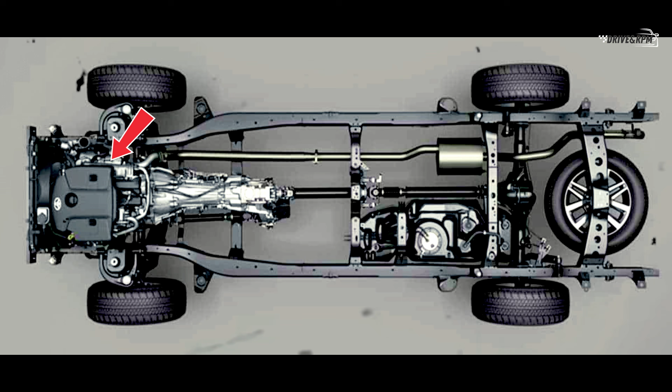For over 70 years, the undisputed golden rule of building an indestructible off-road vehicle was absolute and unyielding. The formula was simple: you take a massive internal combustion engine, bolt it to a heavy, sluggish mechanical gearbox, attach a cast iron transfer case, and run a thick, solid steel drive shaft straight down the longitudinal center of the chassis to physically connect the front and rear axles.

The legacy automakers firmly believed that true durability could only be achieved through heavy, twisting, analog metal. They trusted friction. They trusted physical gears. The 2027 GWM Tank 300 did not just refine this century-old architecture. It put a bullet in it.

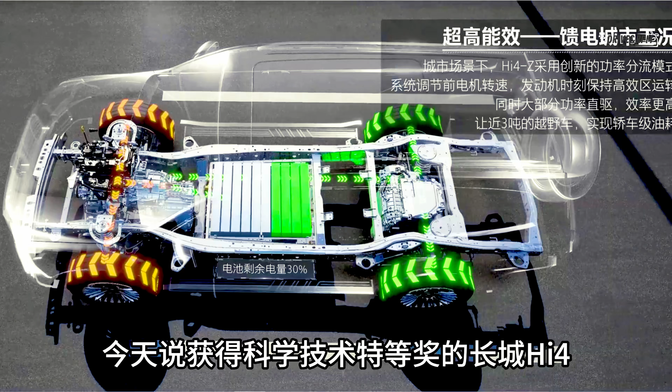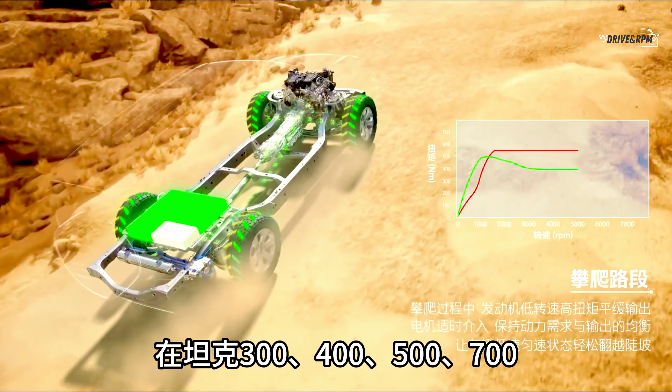GWM engineers have completely severed the physical connection between the front and rear of the vehicle. If you look underneath this new chassis, there is no central prop shaft. The transfer case has been thrown in the bin. The mechanical drive shaft is entirely dead. In this forensic engineering teardown, we are going to expose exactly how Chinese high-voltage architecture just destroyed the traditional 4x4 system, and why the mechanical off-road era has officially come to a violent end.

To truly comprehend the magnitude of this disruption, we must conduct a forensic teardown of the brand new Hi4-Z architecture and compare it to the legacy system still being sold by the Japanese establishment.

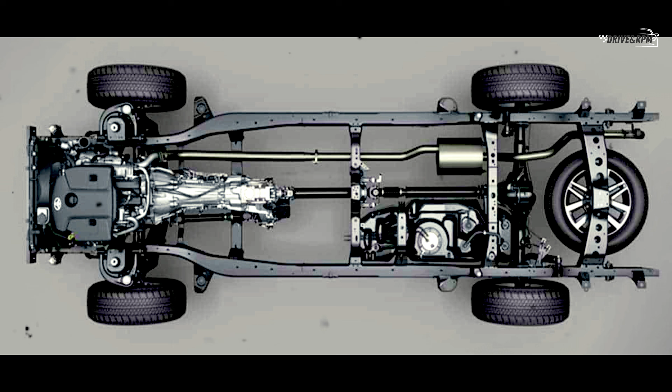In a traditional four-wheel drive vehicle, like a Toyota Land Cruiser or an SW4, your engine's power is forever held hostage by mechanical latency. When you press the accelerator in deep mud, kinetic energy must travel from the crankshaft, through a torque converter, into the transmission, down through the gears of the transfer case, along the heavy steel drive shaft, into the rear differential, and finally out to the wheels. This process suffers from parasitic drivetrain loss. You lose up to 20% of your engine's power simply through the friction of turning all that heavy iron.

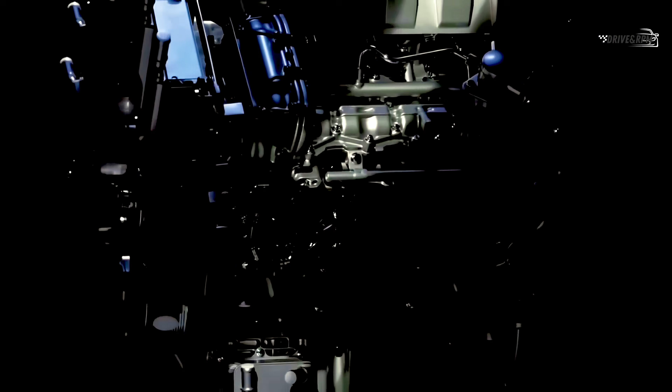The 2027 Tank 300 completely bypasses this analog nightmare. Under the bonnet sits a highly thermally efficient 2.0-liter turbocharged combustion engine. But it is no longer the sole master of the drivetrain. It operates in high-voltage synchronization with two independent ultra-high output electric motors, one on the front axle and a massive unit on the rear.

Because the central drive shaft has been eliminated, these two axles are entirely mechanically independent. They communicate via high-speed, shielded fiber optic data cables rather than a rotating steel tube. This is a 100% electronic by-wire four-wheel drive ecosystem.

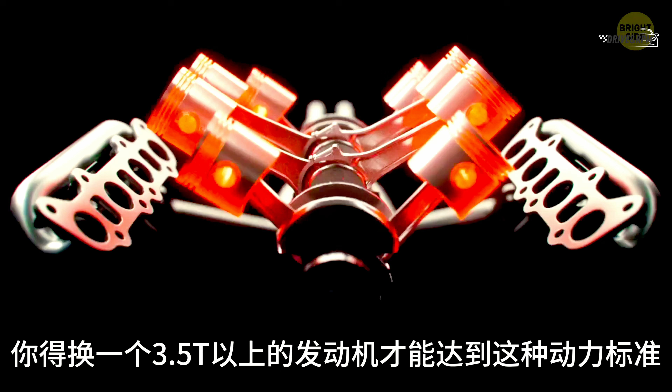The resulting power output is frankly absurd for a mid-size off-roader: a combined 635 kilowatts, roughly 850 horsepower, and over 1,100 Newton meters of instant 0 RPM torque. When an SUV built on a ladder frame can deploy 850 horsepower to individual wheels in fractions of a millisecond without waiting for gears to mesh or shafts to spin up, the fundamental physics of off-road traction are rewritten. The vehicle can push forward with maximum force instantly, making the mechanical delay of traditional locking differentials look entirely prehistoric.

The genius of the Hi4-Z platform is not just what GWM added, but what they ruthlessly removed. When you rip out a massive steel drive shaft, a heavy iron transfer case, the cross members required to hold them, and the central exhaust routing from the belly of a ladder frame vehicle, you are left with an enormous empty structural void underneath the cabin floor pan.

If a legacy automaker like Ford or Land Rover encountered this newfound space, they would likely fill it with heavy structural bracing or simply leave it empty to increase ground clearance. GWM's packaging engineers took a radically different approach. They looked at this massive void and saw the ultimate solution to the greatest problem plaguing the electrification of off-road vehicles: battery capacity and weight distribution.

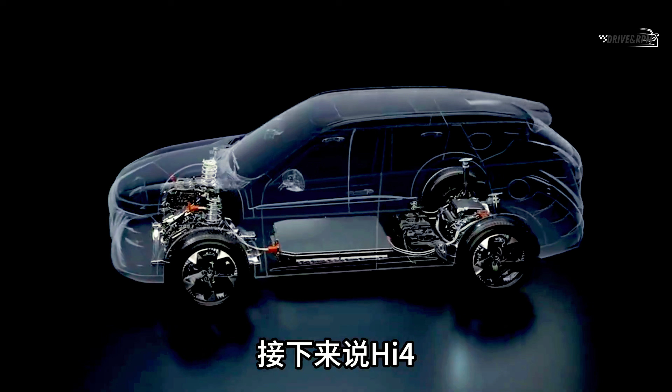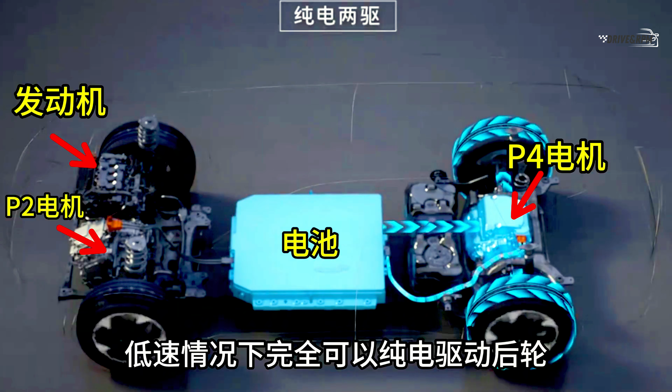Tucked safely, deeply, and securely between the thick, high-strength steel rails of the Tank 300's chassis sits a colossal 59.6 kilowatt-hour battery pack. Let the sheer scale of that sink in. A capacity of nearly 60 kilowatt-hours is substantially larger than the battery packs found in many dedicated, pure electric hatchbacks driving around London or Sydney today.

Yet GWM has packaged it entirely inside the underbelly of a hardcore, mud-plugging, water-wading SUV. This massive energy vault allows the aerodynamically blunt Tank 300 to travel up to 200 kilometers purely on electric power. You can commute through heavy urban traffic all week without the combustion engine ever waking up. But the moment you leave civilization, the turbocharged engine seamlessly transitions into a highly efficient onboard generator, feeding electricity directly to the motors and the battery, delivering infinite range.

This system violently exposes the pathetic 48-volt mild hybrid systems used by Toyota as little more than marketing gimmicks. Furthermore, placing 60 kilowatt-hours of dense lithium-ion cells at the lowest possible point in the chassis drops the center of gravity drastically, pinning the vehicle to the tarmac through high-speed corners and preventing rollovers on extreme off-road cambers.

Now, the automotive purists and traditionalists will immediately raise a valid engineering concern. They will argue that an 850 horsepower electronic drivetrain and a massive underfloor battery pack are completely useless if the skeleton of the vehicle snaps, twists, or fractures when subjected to the violent forces of the wilderness. If a chassis flexes too much under extreme axle articulation, such as climbing a boulder field where diagonal wheels are suspended in the air, the doors will jam, the high-voltage battery casing could rupture, and the vehicle will destroy itself.

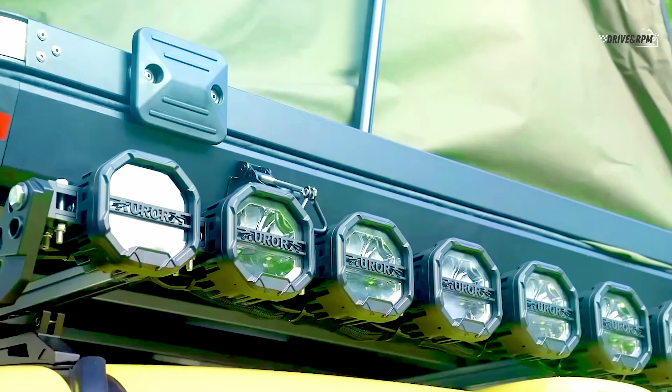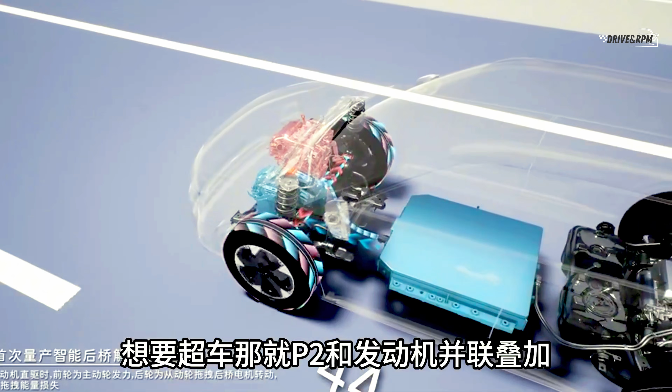GWM stretched the wheelbase by an astonishing 260 millimeters to accommodate the new Hi4-Z architecture, whilst simultaneously pushing the front axle forward to drastically improve the approach angle. Underneath the body panel sits a fully reinforced ladder frame chassis, constructed almost entirely from hot-stamped, ultra-high-strength steel. We are talking about tensile strengths exceeding 1,500 megapascals in critical load-bearing areas, the kind of metallurgy usually reserved for submarine hulls and ballistic armor.

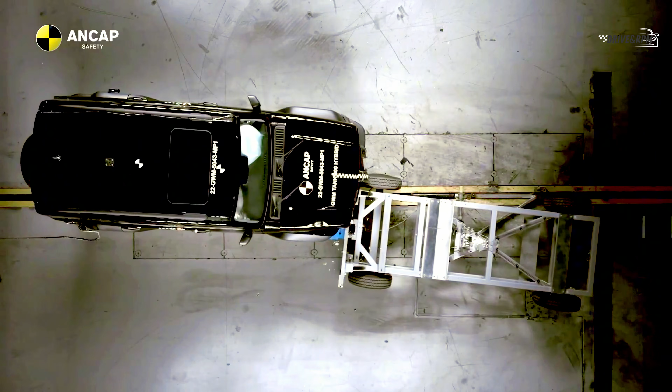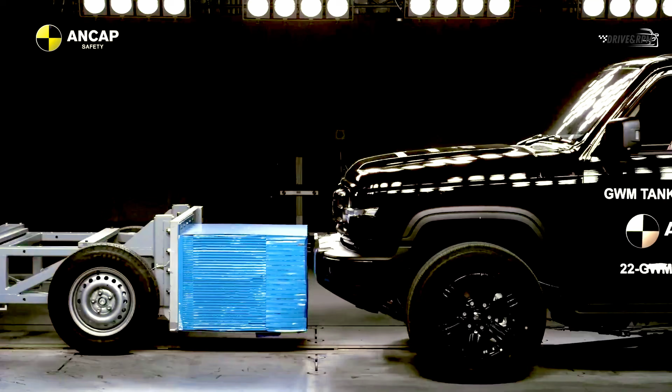This guarantees absolute zero chassis flex, because the frame remains perfectly rigid. The independent double wishbone front suspension and the heavy-duty multi-link rear geometry can stroke through their maximum range of travel without binding. The suspension actually does the work, rather than the chassis twisting to absorb the impact. This proves that you can have the computational power of a supercomputer and the torque of a hypercar, whilst retaining the indestructible, rock-solid baseline of a true wilderness explorer.

The final, devastating nail in the coffin for traditional mechanical four-wheel drive systems is how the 2027 Tank 300 Hi4-Z actually interacts with the topography of the Earth. If you are piloting a standard Toyota Land Cruiser or a Hilux SW4 through a treacherous off-road trail, your survival is dictated entirely by human reaction time and physical mechanical intervention. You must manually assess the mud, stop the vehicle, engage the low-range gearbox, press the buttons to lock your physical differentials, and hope your tires find grip.

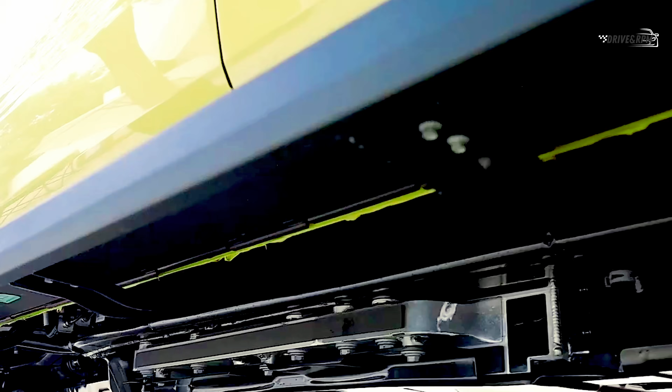The Tank 300 Hi4-Z completely automates and perfects this process by introducing the Coffee Pilot Ultra system, integrating a high-definition Hi4-Z roof-mounted LiDAR sensor into a hardcore off-road vehicle. This supercomputational array is not just for highway lane-keeping assistance. It is an active, predictive off-road weapon. The artificial intelligence continuously fires millions of laser pulses per second, scanning the trail ahead and building a precise 3D topographical map of the ruts, jagged rocks, and mud depth before your front bumper even reaches them.

Instead of waiting for a wheel to slip and then mechanically reacting, the central supercomputer preemptively calculates the exact friction coefficient of the terrain. Using advanced digital torque vectoring, it modulates power to the independent electric motors in fractions of a millisecond. If the LiDAR detects a patch of zero-friction ice or deep mud on the right side, it seamlessly cuts torque to those wheels and transfers 100% of the driving force to the tires with maximum grip.

The vehicle does not react to getting stuck. It mathematically computes how to avoid losing traction in the first place. It makes heavy, binding mechanical locking differentials look entirely obsolete, allowing the Tank 300 to glide over obstacles that would leave traditional 4x4s digging their own graves.

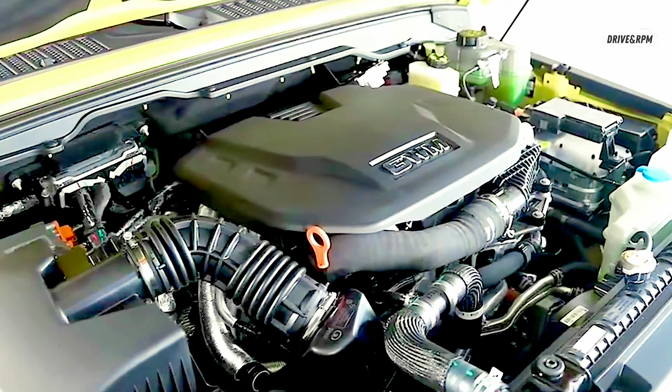When we compile every single element of this forensic teardown, the complete and total elimination of the physical driveshaft, the deployment of independent by-wire axles, the brutal 850 horsepower output, the 60 kilowatt-hour underfloor power vault, the submarine-grade ladder frame, and the LiDAR-guided predictive traction control, it brings us to one undeniable, historic conclusion. The 2027 GWM Tank 300 Hi4-Z has violently shifted the paradigm of the global automotive industry.

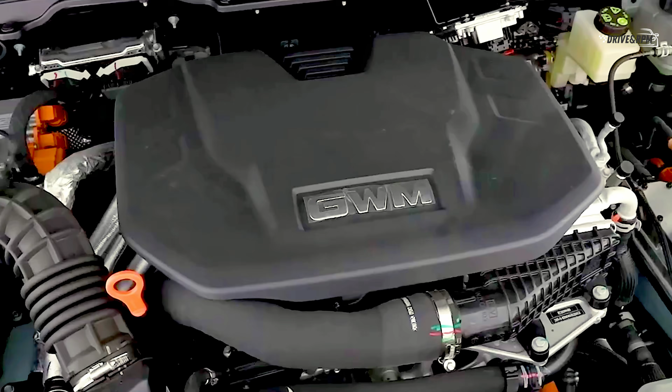For the last half-century, the establishment firmly believed that off-road supremacy required heavy, purely analog mechanical systems. They convinced the buying public that electronics were too fragile for the harsh realities of the outback or the jungle, and that true reliability required spinning steel shafts and iron gears. But by replacing those inefficient, heavy physical connections with a smart, high-voltage digital architecture, Chinese engineering has created a vehicle that is not only exponentially faster on the tarmac and infinitely more comfortable, but fundamentally more capable in the dirt.

The legacy manufacturers, particularly the Japanese giants, have rightfully worn the crown as the kings of the wilderness for generations. But when faced with a digital predator that can rewrite its own traction physics every single millisecond, generate 850 horsepower, and power itself without a single drive shaft under the floor, analog engineering ceases to be an advantage. It becomes a massive, heavy liability. The mechanical era of off-roading is officially dead. The high-voltage, electronic 4x4 revolution has arrived, and the old guard is completely unprepared for the slaughter.